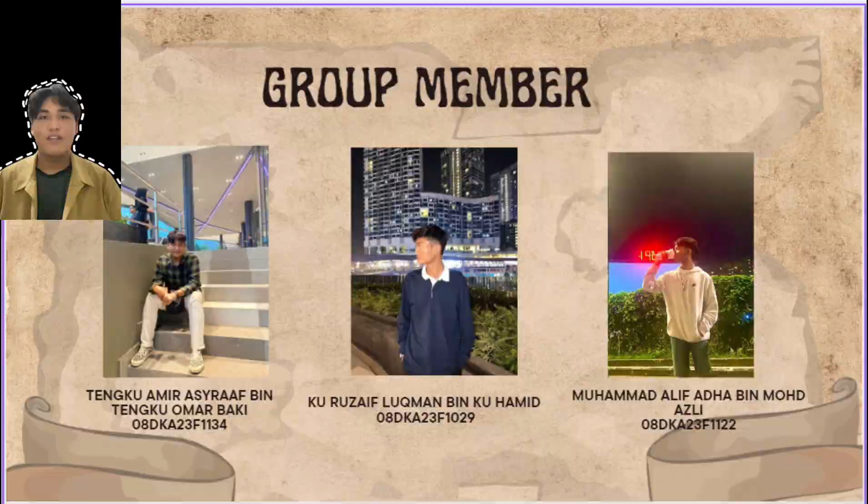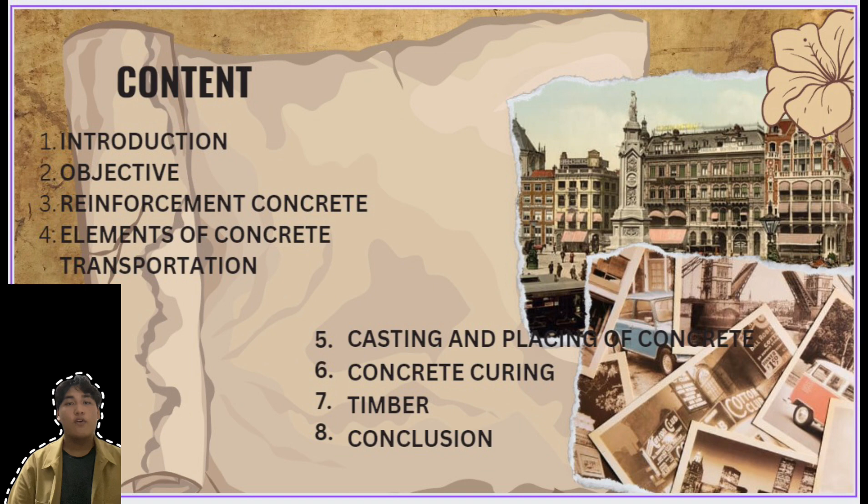Our content in this slide will be: first, introduction, objective, reinforcement concrete, element of concrete transportation, casting and placing of concrete, concrete curing, timber, and conclusion.

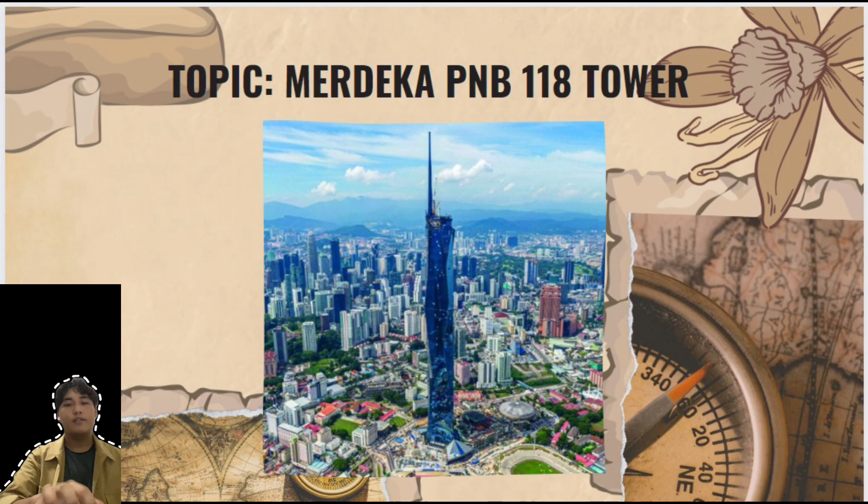The topic is Merdeka PNB 118 Tower. Firstly, introduction about Merdeka PNB 118 Tower.

Merdeka 118 Tower, formerly known as Menara Warisan Merdeka KL 118 and PNB 118, is a 118-storey megatall skyscraper in Kuala Lumpur. At 678.9 meters, it is the second tallest building and structure in the world, only behind the Burj Khalifa at 828 meters.

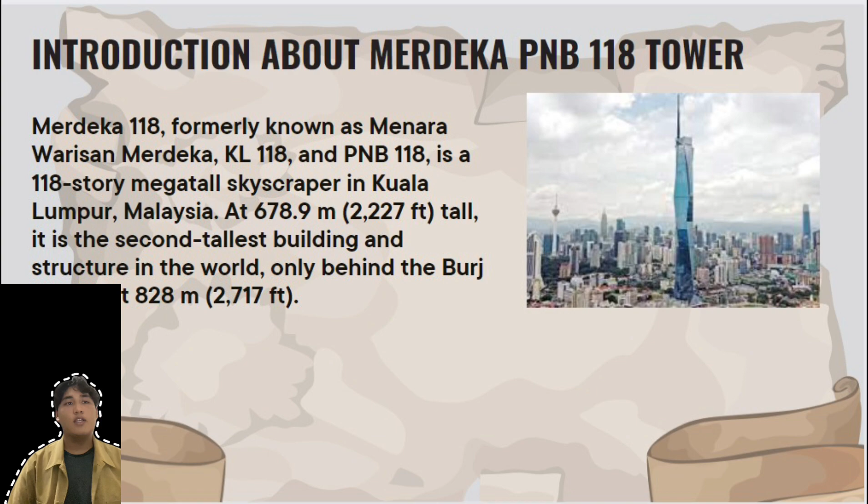The research objectives in this topic are: explaining about reinforced concrete; recognizing the elements of transportation methods of concrete transportation on site and batching plant; explaining the procedure of casting and placing of concrete; describing the method of concrete curing; and lastly, explaining the use of local timber as construction material on construction site.

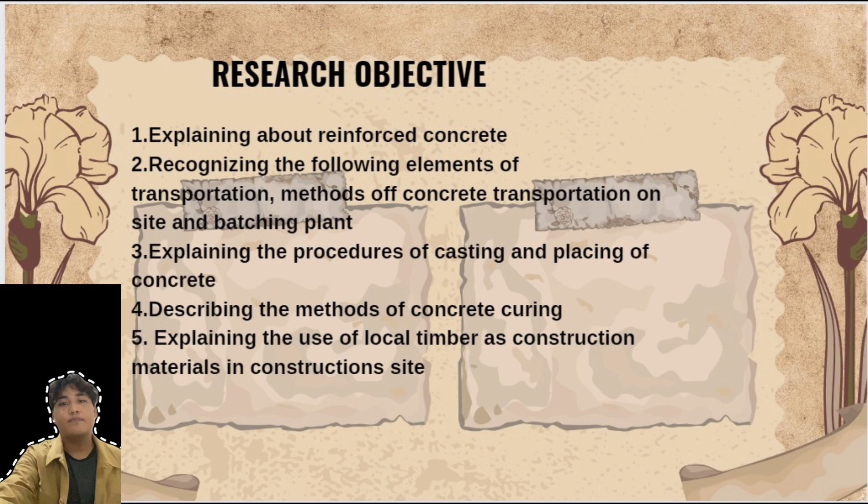The objective of building Merdeka PNB 118 Tower: Merdeka 118 will feature a state-of-the-art tower standing at 678.9 meters that will transform the area, once known for its sporting arena, into the capital's new landmark of premium office buildings, hotels, malls, residences, heritage sites, museum, and mosque.

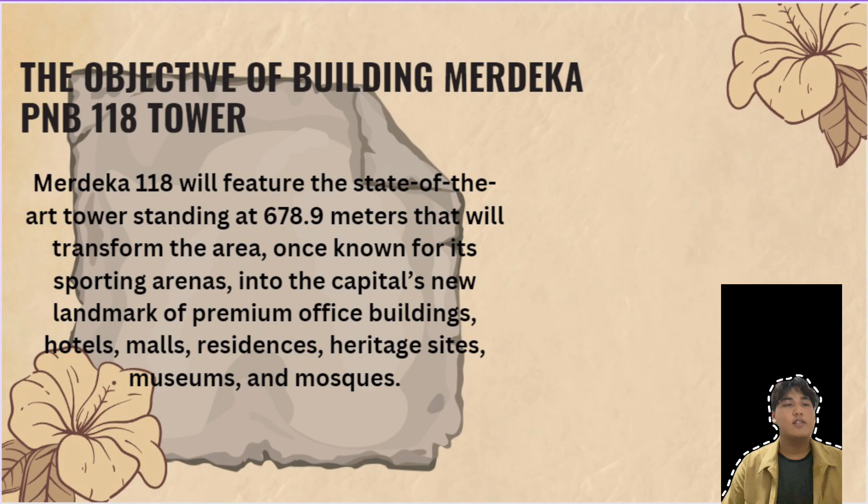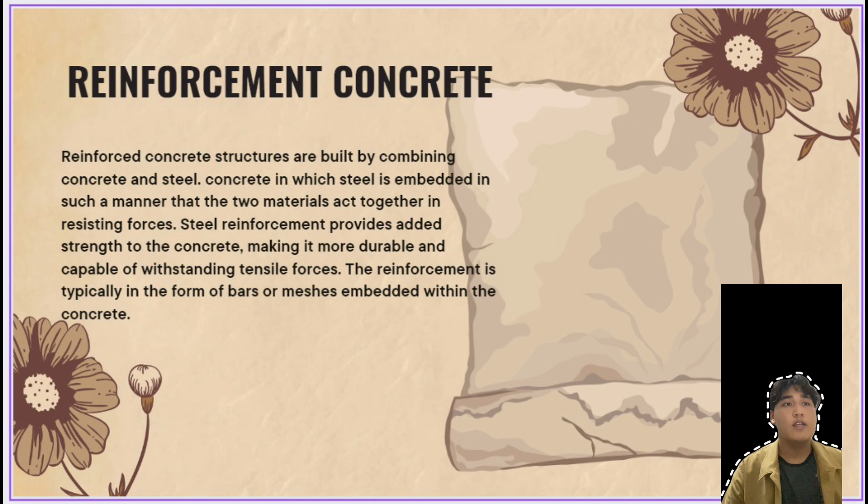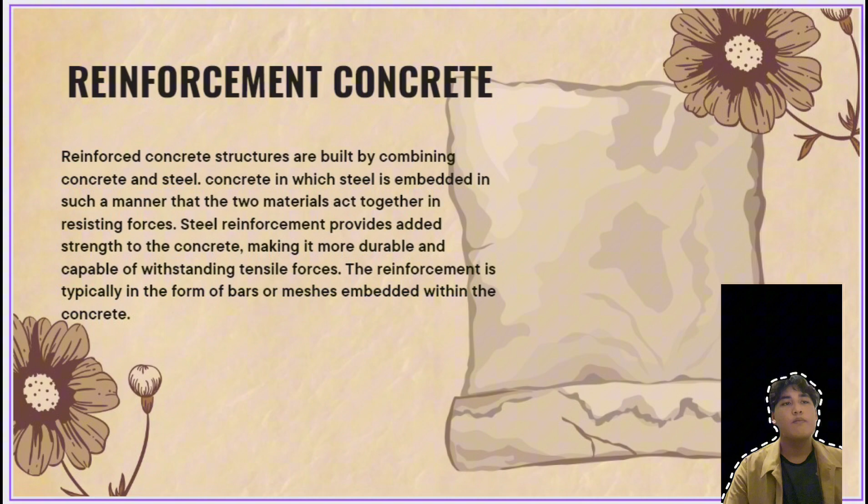In reinforced concrete, reinforced concrete structures are built by combining concrete and steel. Concrete is where steel is embedded in such a manner that the two materials act together in resisting force. Steel reinforcement provides strength to the concrete, making it more durable and capable of withstanding tensile force. The reinforcement is typically in the form of bars or meshes embedded within the concrete.

The steel reinforcement used in Merdeka PNB 118 Tower is hot rolled high yield steel. Hot rolled high yield steel has a yield strength of 460. This steel has a carbon content higher than mild steel. It is manufactured with a rough surface to improve bonding.

Furthermore, Merdeka 118 features an external steel structure supported by a reinforced concrete megastructure that offers lateral stability. The megastructure features mega columns at the perimeter that are connected to the central structure through structural steel outriggers at 3 locations. Belt trusses are used to support the megastructure and render improved strength to the tower.

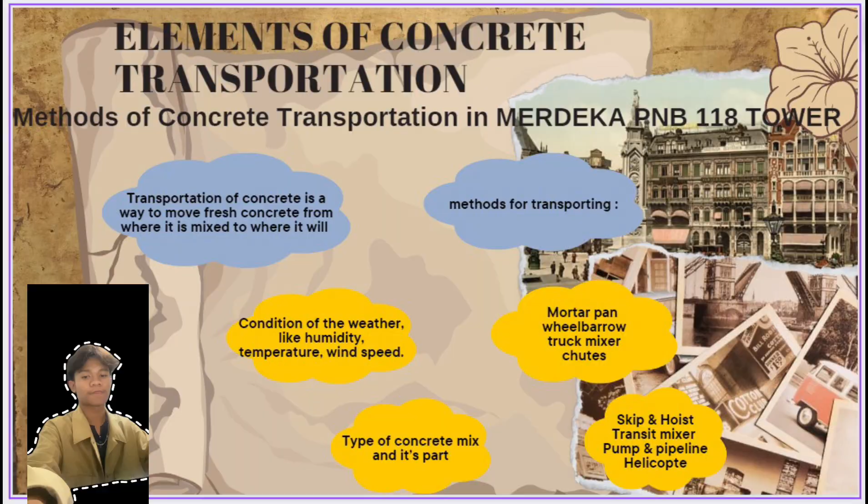Now I will tell you what transit mixer and mortar pan are. Transit mixer is one of the most popular equipment for transporting concrete over long distances, mostly used in RMC plants, ready mix concrete plants. The transit mixer is mounted on a truck and may have a capacity of 4 to 7 cubic meters. Concrete is continuously agitated in the truck with 2 to 6 revolutions per minute. A small pump is fitted on the truck mixer for discharging concrete. Concrete fed in the mixer can be either dry or wet mix. If the mix is wet, it must reach the site within 1 to 1.5 hours.

Mortar pan is used when concrete is carried out in small quantities. In this method, a greater surface of concrete is exposed to drying conditions, resulting in a great loss of water, particularly in hot weather concreting. Remember that the mortar pan should be clean and wet at the start of concrete transportation.

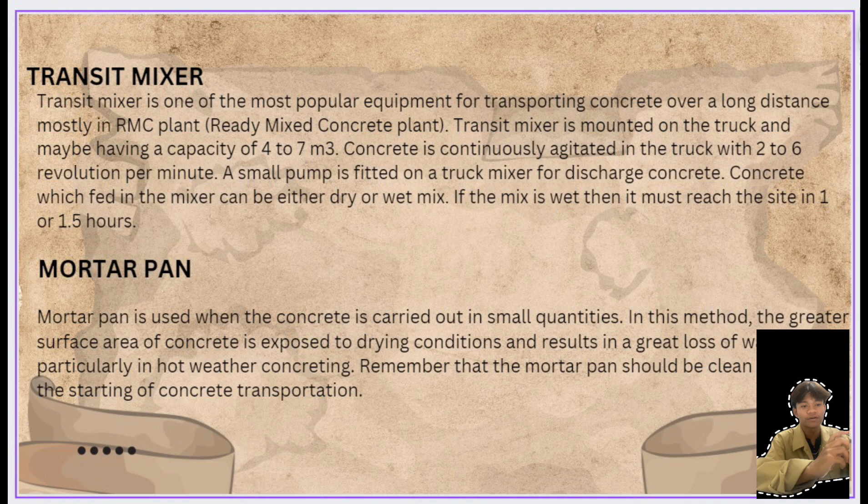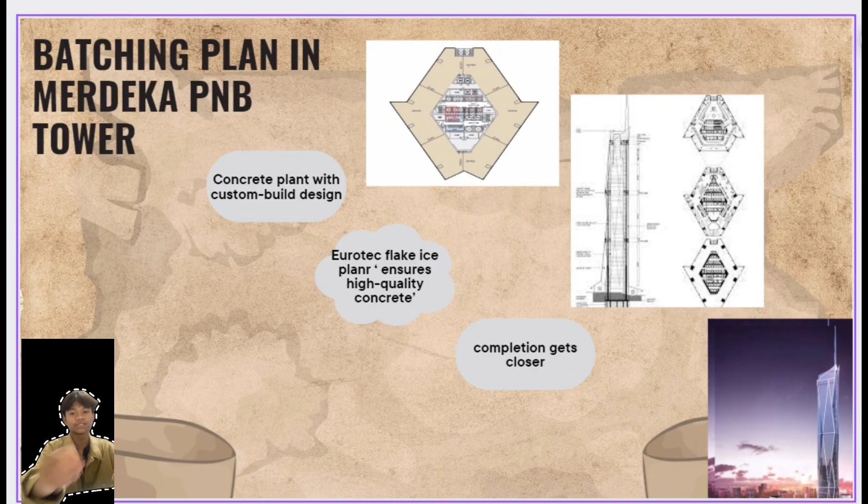So there are a few steps of the batching plant in Merdeka PNB Tower. First, a concrete plant with custom built design. Second, a Eurotec flake ice plant to ensure high quality concrete. Third, completion gets closer, so there are a few procedures of casting and placing of concrete.

Firstly, design a concrete mix that would meet the stringent strength and durability requirements for such a tall building. The mix had to be able to withstand the high loads and stress, as well as the harsh environmental conditions of Kuala Lumpur.

Then, construct the formwork for the concrete casting. The formwork had to be precise and strong to support the wet concrete. The design should allow easy removal of the forms once the concrete cured.

So thirdly, the first stage involves casting the base of the building, which is the thickest and most heavily reinforced part of the structure. After the base had cured, the casting of the upper floors could begin.

Fourth, the concrete was cast in layers, each layer being compacted to ensure there were no air pockets. The concrete was carefully monitored to ensure proper curing.

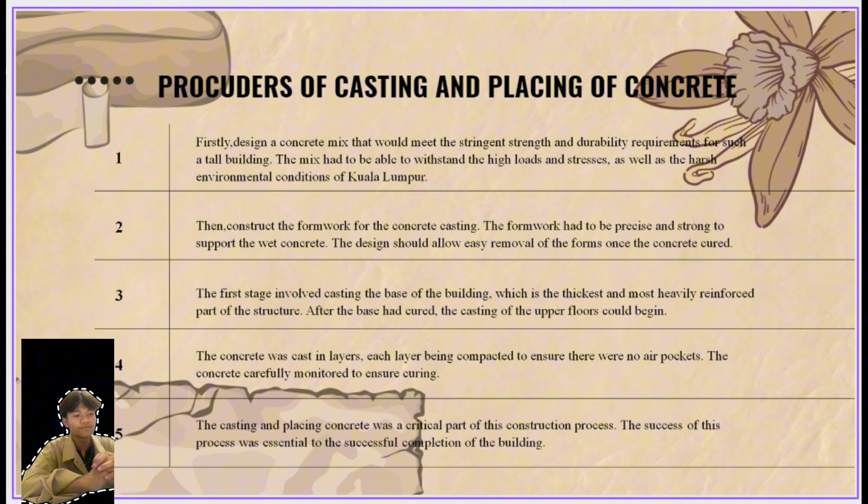Lastly, the casting and placing of concrete was a critical part of this construction process. The success of this process was essential to the successful completion of the building.

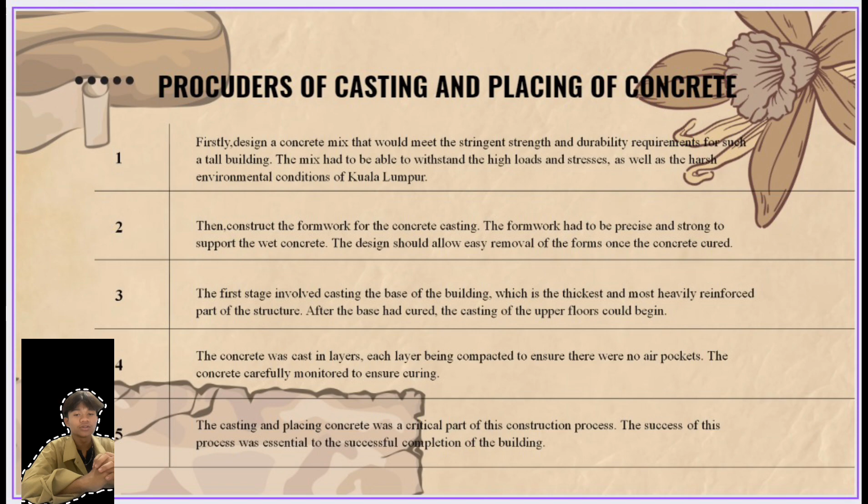Concrete curing is the process of maintaining adequate moisture in concrete within a proper temperature range in order to aid cement's hydration at an early age. Hydration is the chemical reaction between cement and water that results in the formation of various chemicals contributing to setting and hardening.

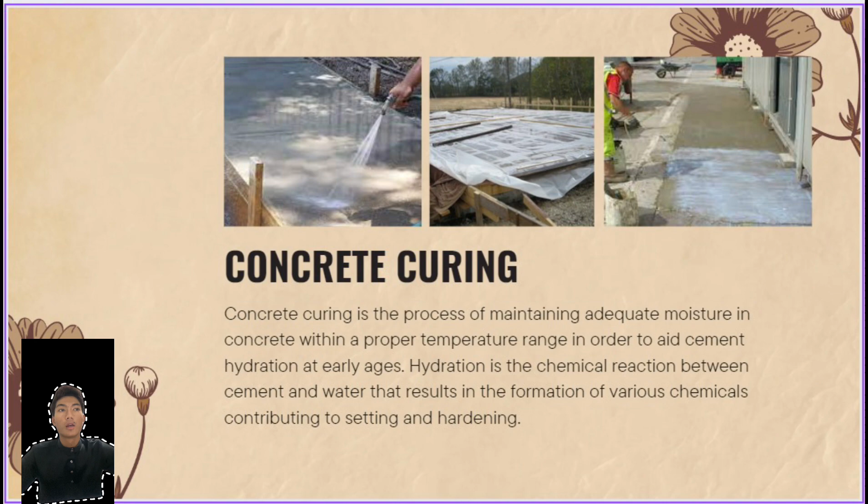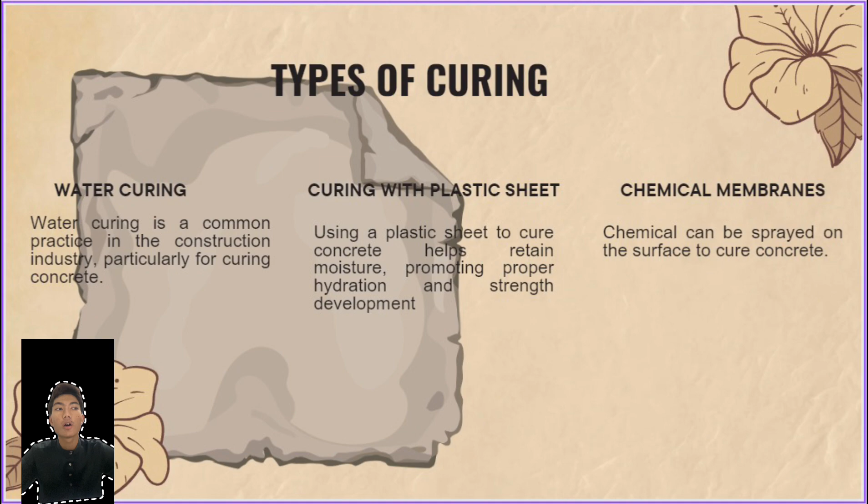Next is the types of curing. First is water curing, a common practice in the construction industry, particularly for curing concrete. Next is curing with a plastic sheet. Using a plastic sheet to cure concrete helps retain moisture, promoting proper hydration and strength development. Next is chemical membrane curing, where chemicals can be sprayed on the surface to cure concrete.

Next is the type of curing used at Merdeka PNB 118. First is water curing, because water curing does not take a long time, as the temperature in Malaysia is so hot and the weather in Malaysia only has two conditions, which is rain or heat.

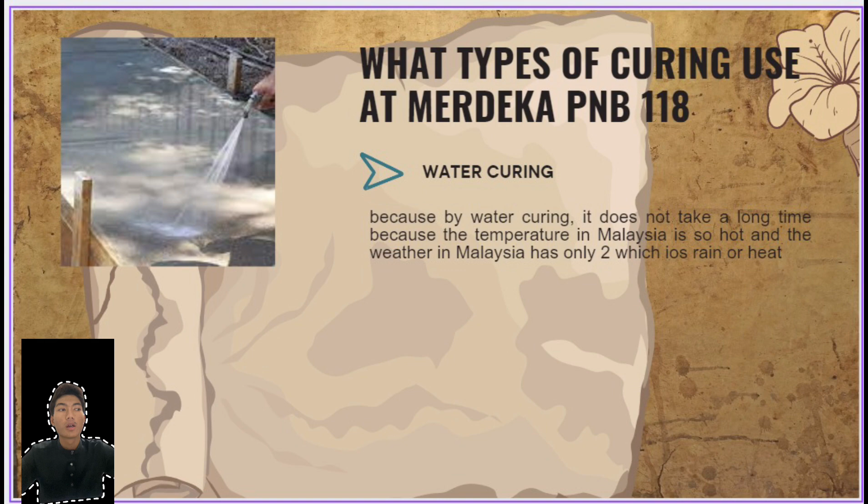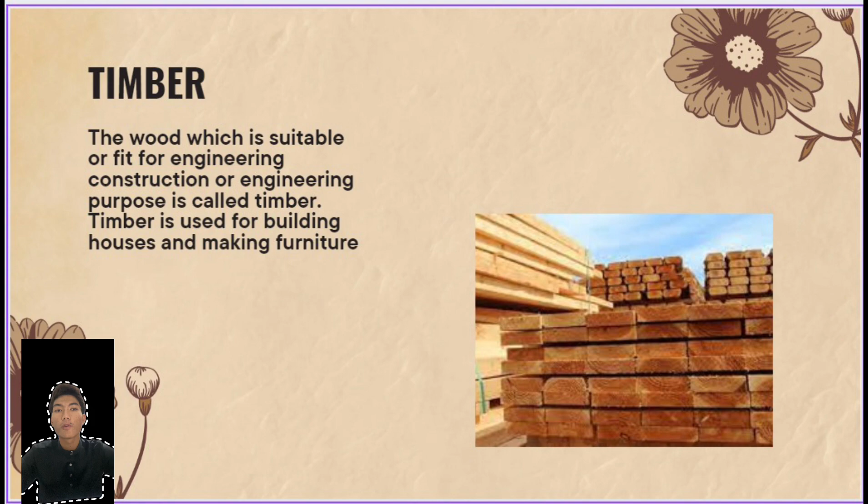Next is timber. The wood which is suitable or fit for engineering construction or engineering purposes is called timber. Timber is used for building houses and making furniture.

Next is the type of timber for construction. First is plywood, also called board, used to make formwork before concrete placement. Next is kocai, 1x2, which is used to make formwork and beams.

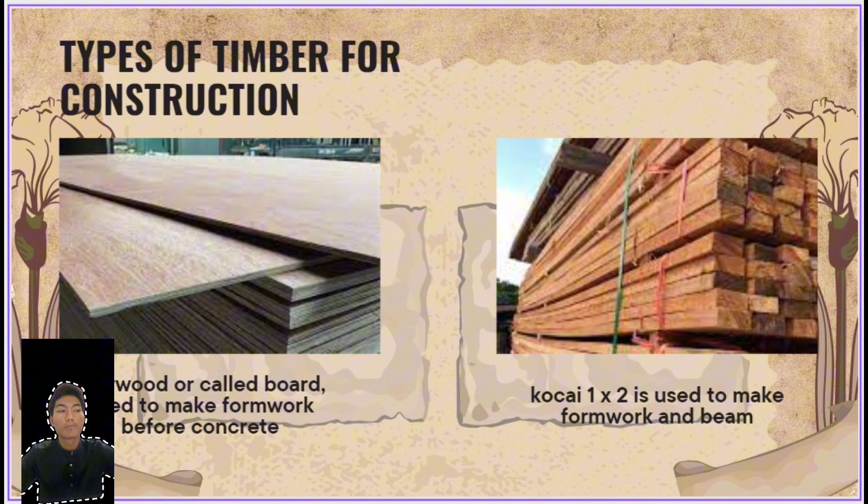Lastly, a conclusion. Merdeka PNB 118 is a building with a concise and iconic tower with the people of Malaysia as its core. This new landmark in Kuala Lumpur will be the tallest in Malaysia, honoring its past and serving as a beacon to the nation's bright future.

When someone mentions an iconic tower, what exactly does it mean? What is it that makes a tower iconic? The design, the shape, the story or history that lies behind the development? Perhaps in this case it may be all those things, but it is also the aspiration, the desire for excellence, and the determination to build something memorable and lasting, something that can define a new Malaysia.